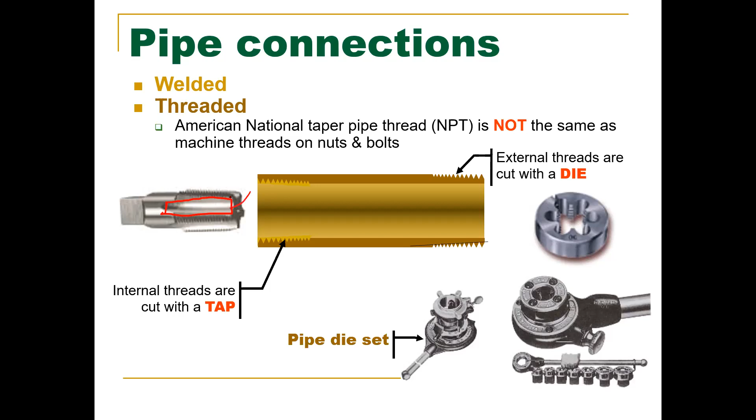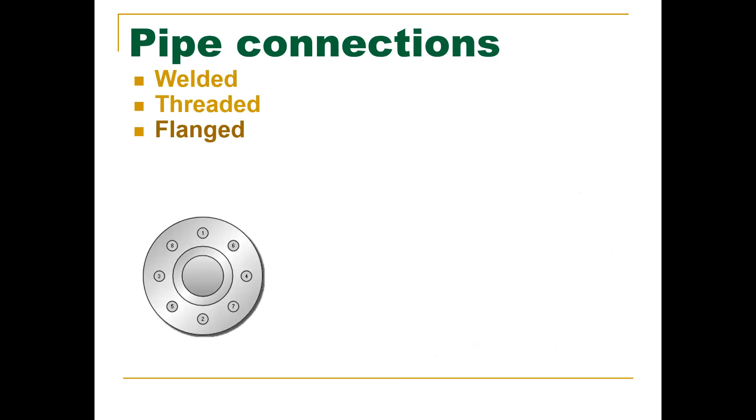Did we speak at all about flanges? Flanges may be threaded, welded, or cast into the pipe section. You can see right here, this one is a screw flange. You have the actual flange itself, this metal piece right here.

This metal piece right here is going to be threaded onto the pipe. We also have a flange that the pipe is spread out.

You can see it right there, and that's going to be stopping the flange itself. Then we have a flange that will go on and it's welded on both sides, so it doesn't have leak by going either way.

And then we have over here, which is a welded neck flange, where the entire flange goes deep outwards, and it meets up and we do that V groove, that V weld.

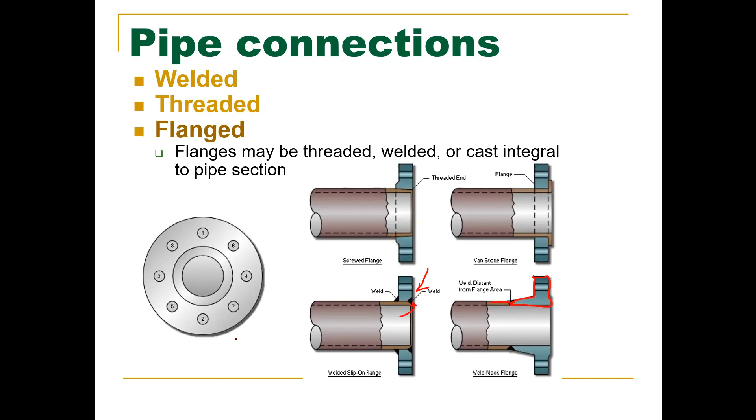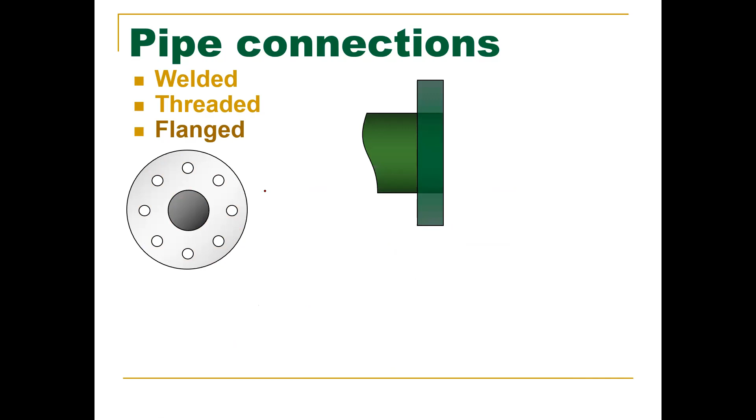So when doing flanges, this is when we start using gaskets. For low pressure, we use a gasket that covers the entire face of the actual flange. So when you see this sign right here, that is low pressure, LP. These are made out of rubber, paper, flexible graphite, synthetics, stuff like that.

For you guys who go out and decide to ship after this, the best paper to be used as a gasket is chart paper. Chart paper is pretty thick, thicker than normal paper. It does really, really good job at that. So if you're a mate in the class and an engineer comes asking for it, this is the why, this is the reason.

Going from there, we use bolts and nuts to screw it together. They're tightened down, and here's the big thing. If you look at this, watch how that goes in, notice how it's going in an opposite pattern, each one it goes in, it goes to the opposite. That's done on purpose.

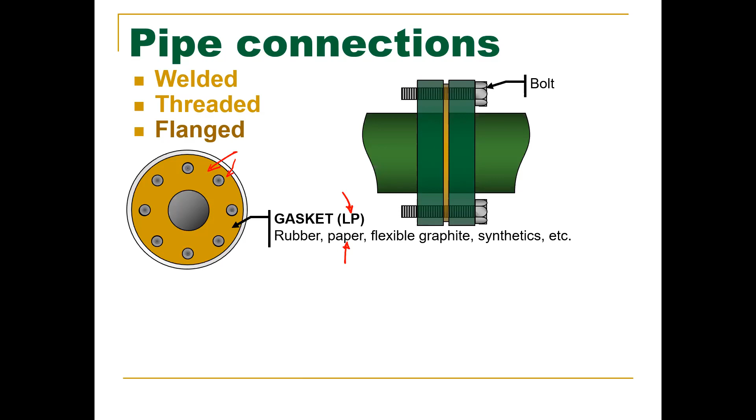It's called a star pattern. Not only should you be inserting the bolts like that, but you should also be tightening them down in that pattern as well. They're done that way for a reason. Why would we want to go from 1 to 2 to 3 to 4 to 5 to 6 to 7 to 8? So that it's even.

You want to go down even, exactly. If you don't, you'll end up with a flange that will look like this, and it'll just leak out of the top. So always use what is called a star pattern, or if you have a picture that looks like that.

Now, let me erase some of this so you can actually physically see it. If you look, this is going to be HP, and it's different. We have our flange piece right here, but it also has a piece of metal that sticks out, you can see that here.

That's that ring right there, a physical piece of metal that's sticking out from the flange. And it's important because high pressure gaskets are smaller and they're used differently, they're either metallic or Flexitallic. If you notice, the whole gasket isn't all the way around like it is there, it's a very thin spot that goes right in between those two pieces of raised metal.

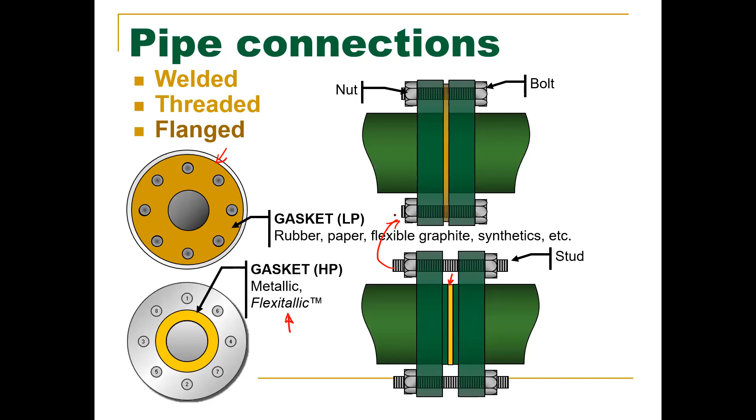Then they use studs instead of bolts and nuts. They still get nutted down on each side though. You can use a stud on a low pressure side, but you can't use a bolt on a high pressure side.

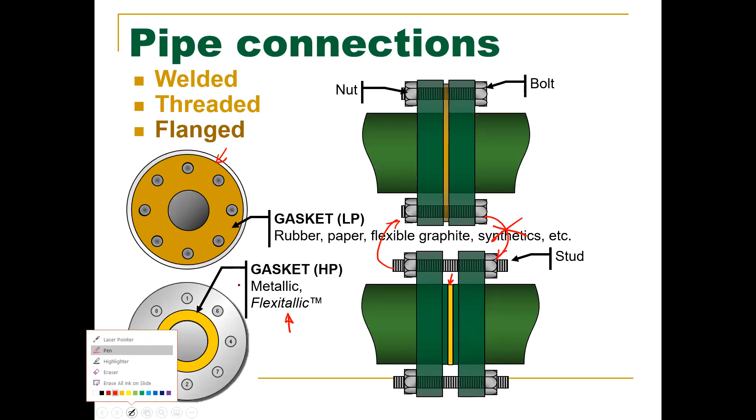What is different to the front of the vessel? Is the whole ship going to move in one whole piece? Does the ship bend slightly? So the ship will basically contort, it will move, it will twist differently in each portion of the vessel, depending where the wave is as it's getting hit.

So when you walk down Shaft Alley, when you go on your first cruise this summer during high seas, the entire Shaft Alley will be twisting in different ways. And it's why you can see it on the longest stretch of the ship, you can see that two different portions will be moving in two different directions, even though it's connected via steel. That happens just naturally, that's what's happening.

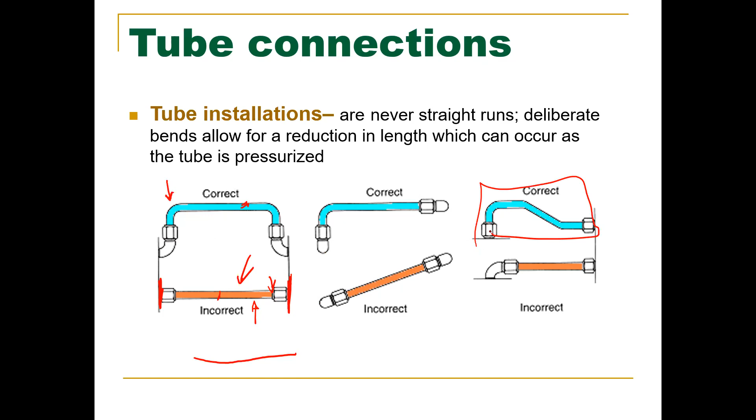Now, brazing or sweating. Who here has ever done any sort of copper soldering for piping, or done any electronic soldering?

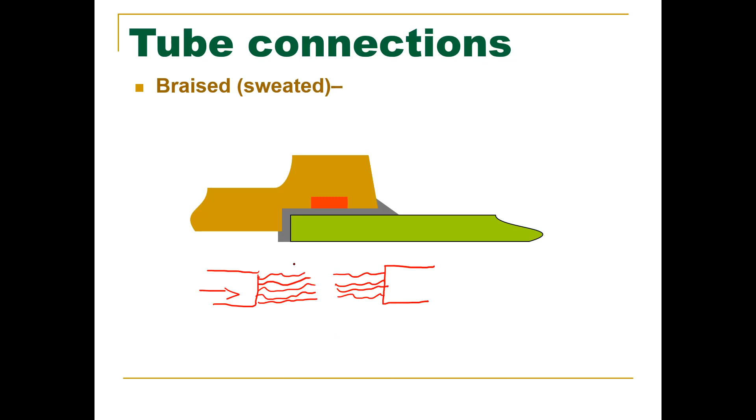When you are soldering two pieces of wire together, it's that stranded wire, it's not solid. What's the first step you take with it? Don't you twist it up? You would twist it up so it would make a solid connection, right? That's what you would do. You would take those two wires and twist and turn them into a nice little knot. Then you apply heat, then you apply solder, and you make it one solid connection. But twisting all those wires up, how are we going to get solder into the deepest part of that wire ball? We want to make a physical connection. We're trying to run electricity, and we want to run electricity through a full piece of wire. That entire diameter of wire, we want to run electricity through the entire thing, not just the outside. So how do we get solder into all those nooks and crannies?

We're going to utilize something called flux. That flux is a certain type of material, it's like a gel-like material. You would dip both ends of the wire into it, and as you bring them together, that flux is all over. What flux does is it melts and turns into a liquid right below the temperature where solder becomes liquid. As the flux begins to boil and becomes an actual liquid, you add the solder to it, and the solder will flow into all the nooks and crannies because it wants to follow that heat. It wants to go to that heat, and the flux will be pulling the solder into all of those nooks and crannies. So that bundle of wire that you've twisted together is now one solid piece. And that same idea of using flux applies to piping.

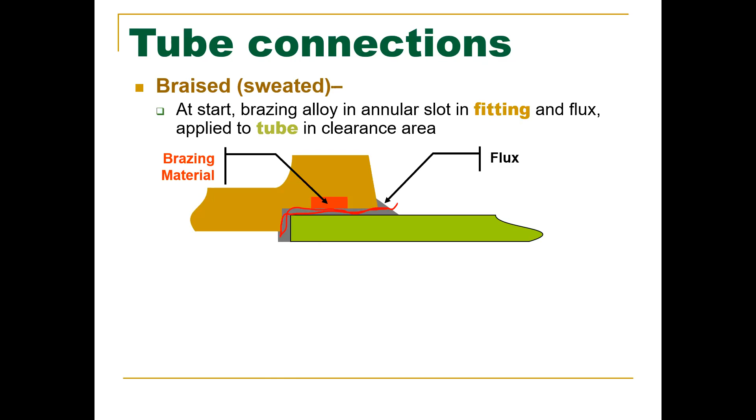We want to make sure that solder gets into all of the nooks and crannies of our pipe that we're trying to solder. So we utilize flux. We start with flux, we dip it into both sides, one side of our pipe, the other side of the fitting. We will heat the tube, and then we'll start to heat the fitting. We will then add our solder. Once the solder is added, it will flow to everywhere the flux was, and the flux pulls it all in. That's how we make that solid connection. Does that make sense? All right, good.

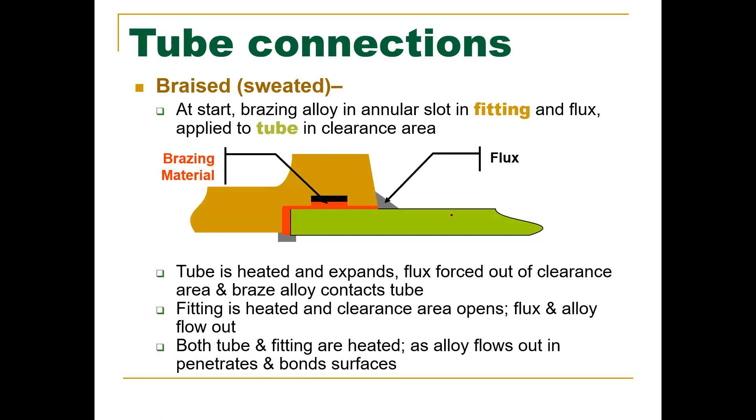So that's sweating. And then we can use something called flared fittings. Flared fittings use what's called a flaring tool. I have mine right in front of me. This is one portion of it, you can see it has a slight taper to it. Let me stop sharing so you can see it easier. It has a slight taper to it, and then this is the top portion, you can see that it also has a taper to it.

The pipe will be inserted into the hole, and you put the flaring tool into it. Let's find a good angle right there. You basically rotate it and smush the pipe to match both sides of that flare. So that's basically what you're doing, you're clamping the two and trying to utilize that taper on either side of the tool.

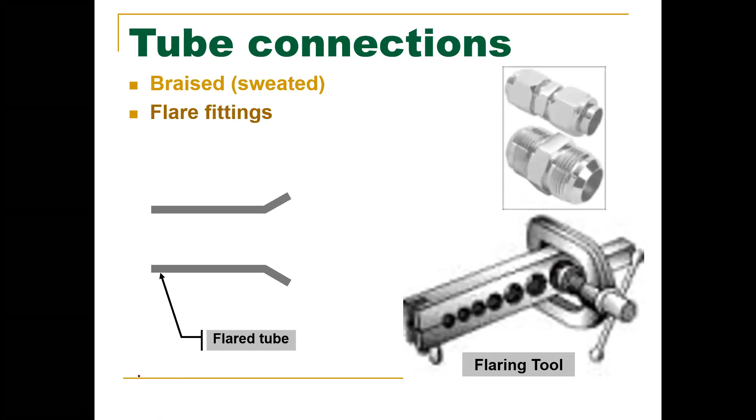Now, these type of connections will fail quicker than other types. You put these in because you have to, not because you want to.

What's happening as we flare out the copper tubing? What are we doing? Compromising the integrity of the pipe. Exactly. We're stretching, we're manipulating it, we're elongating it, we're thinning out the wall. Pretty much the failure point for these things is right there.

They will last a while, don't get me wrong, but they will fail a lot quicker than other types of fittings. Now, you will see these types of fittings around, used in different applications, but they're different from the copper type, using a flaring tool.

If you look below your toilet, below your sink, you'll see that you have flaring nuts, but it's a different type. They're not elongating the material.

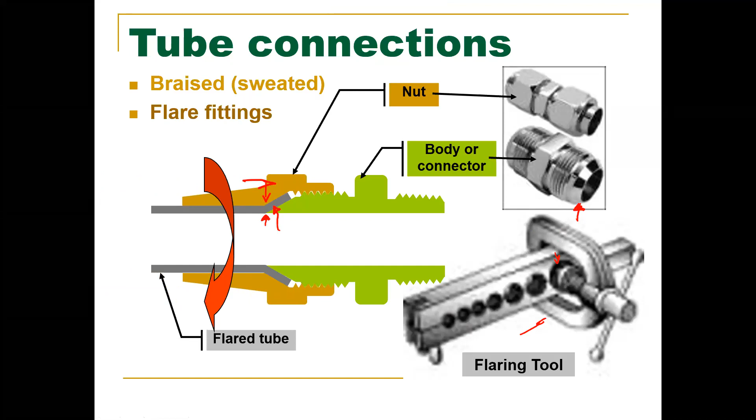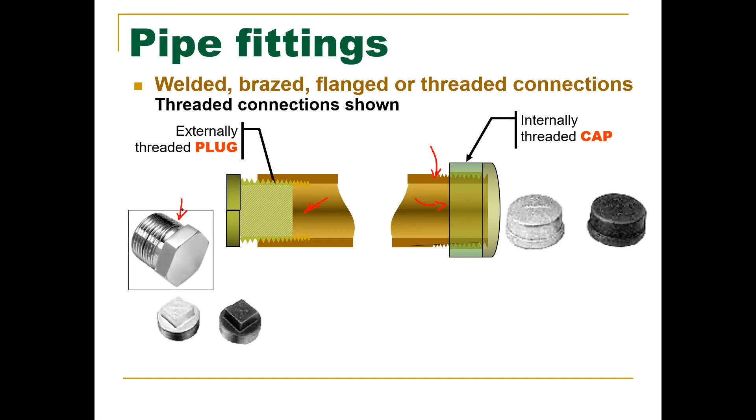So other types of pipe fittings that we have: if we want to stop a piece of pipe, we have what's called a cap. It uses internal threads, threads onto the external threads of your pipe, and it stops the flow. Then we have what's called a plug. A plug utilizes external threads to thread into the internal threads of the pipe.

If we have two pipes of equal size, we use what's called a nipple. They can go all the way up until about 6 inches. You tend to have all of these threaded fittings in what's called a Vidmar, which is just a big metal cabinet.

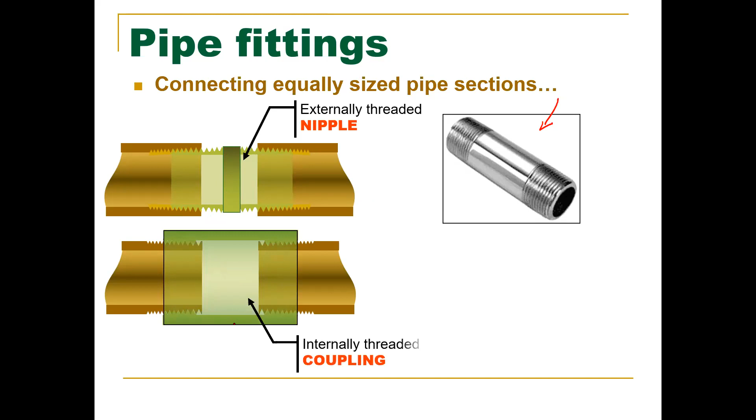These fittings basically utilize external threads to go into two sides of internal threads. Then we have what's called a coupling, which has internal threads that thread onto the external threads of your two pieces of pipe.

Now we have what is called a union. If we have a piece of pipe like this, we have pipe 1 and pipe 2. If I rotate this pipe this way, what happens to pipe 2 if I rotate that coupling in that direction? It gets loosened. It gets loosened where? Pipe 1.

Exactly, but that's only if pipe 1 is not able to free spin. If pipe 1 can rotate freely, then going in this direction will be fine. But if pipe 1 is attached to a bulkhead, or to a piece of equipment or a long piece of pipe, it's exactly right: as you screw down and go in this direction trying to tighten it onto pipe 2, you will unthread it from pipe 1.

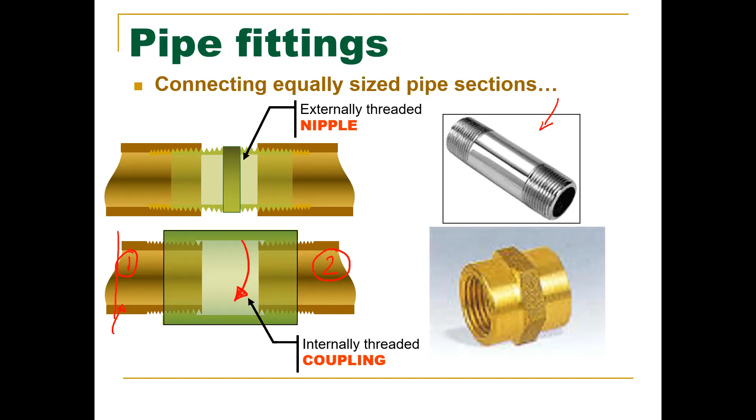And that's where a union comes in. It's made up of 3 pieces. We have one side that will thread onto one pipe normally, and the other side will thread onto the other pipe normally. These are 2 separate pieces. Then we have a third piece, which is the collar, that will basically unite the 2 together.

And it utilizes a metal-to-metal contact right here and right here, and that metal-to-metal contact is where our seal is being created. These threads right here do not create the seal between these 2 pieces of this union. It's metal-to-metal contact on these things.

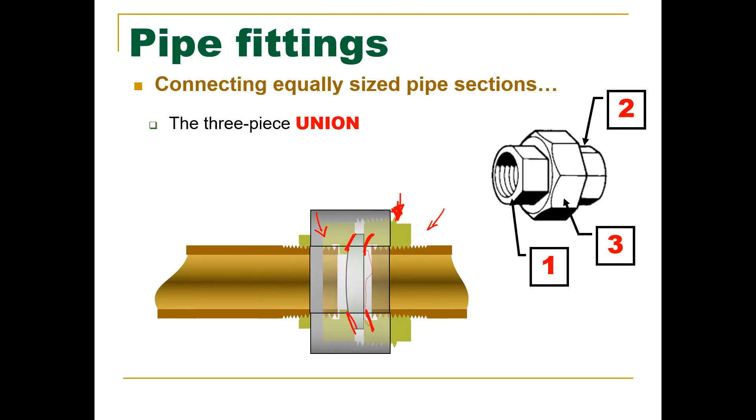The nice thing is that you can remove piping without having to cut out large sections, all the way back to the original piece of piping or equipment. This may be a 4-foot long piece of pipe with all these different things on it in order to free up this pipe to put a coupling on. That would be ridiculous. So if you want to break a section of piping into 2 sections, you would use a union.

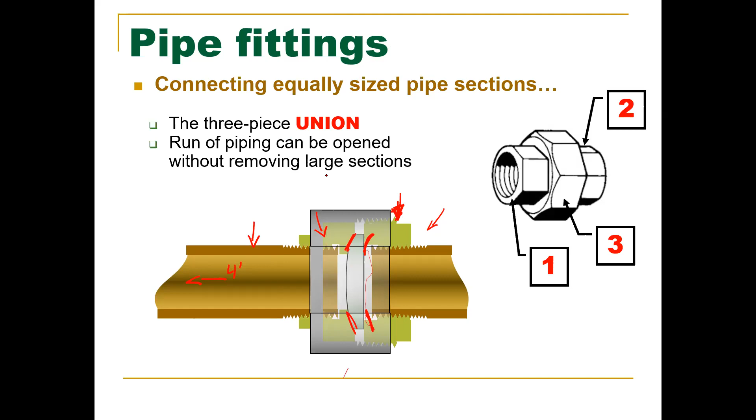If you have unequal sized pipes, this is a bushing. It utilizes external threads and internal threads.

And then we have what is called a coupling, a bell reducer. The bell reducer has both sides with internal threads, and they're unequal size piping. They don't use metal to metal for that one. These are threads, all threaded connections here.

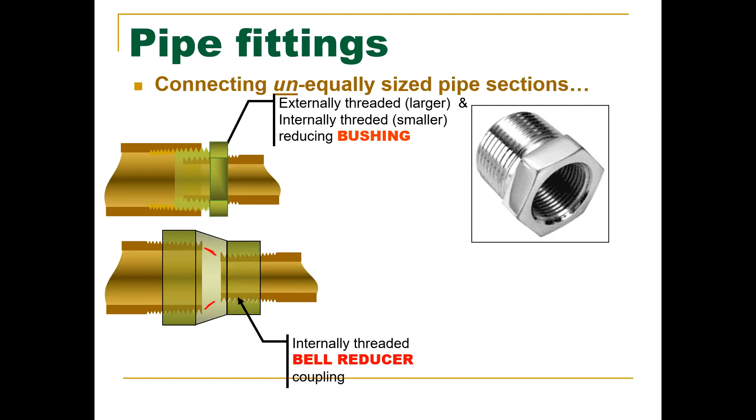So when it's all threaded, you don't need a metal to metal seal. There's going to be nothing in this area making a seal, so the 2 pipes are not making contact with each other. There's going to be a space here. I have some pictures after we're almost done with these slides that we can go through, and it'll make a lot more sense.

If you want to connect multiple pipe sections together, we have what's called the T. So there's our 3 connections right there. We have a reducing T. More often than not, you will see a reducing T that will not look like this. This is nice if you want to add chemicals to a water stream or something like that.

If you're going to have a reducing T, fluid will be coming in this direction, a 1-inch piece of pipe coming in, and then it will be split off into 2 different directions evenly. So this would be a 1/2 inch, and this over here would be a 1/2 inch piece of pipe. The flow will go to 2 different directions evenly. Or you can have it opposite, where 2 different feeds are going in at 1/2 inch and come in together, and one won't have dominance over the other with flow.

So that's a reducing T. And then you have a T with a side outlet. I have quite literally never seen one of these, very specialty. This is not something that you would have on a ship just on standby. You would have T's and stuff, but a side outlet T, no, that'd be something you would specialty order.

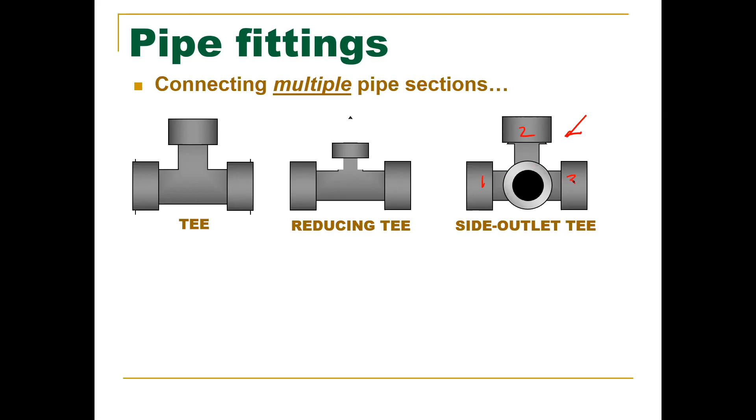So it has 4 outlets: 1, 2, 3, and then the 4th one right there. You have a cross, again the 4 outlets, 1, 2, 3, and then 4. We have a Y bend. This one is utilized a lot in firefighting equipment, so look on the ship, you'll see these. One side will have the hose, the other would be nothing.

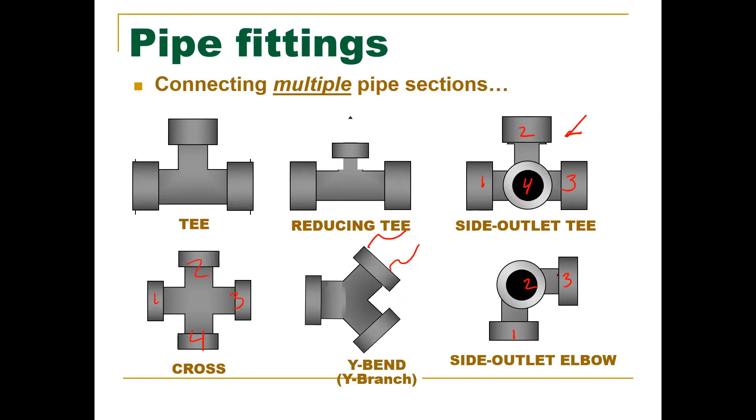And then we have a 90 with a side outlet, or an elbow with a side outlet, with 3 different pieces there. Now, if you want to change the flow and its direction, we utilize what's called an elbow.

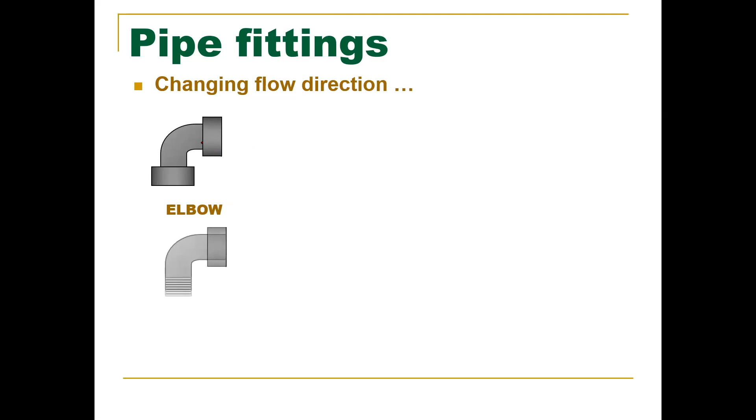Now we have something called a street elbow. These you tend not to see. They're specialty, but not as much as what I was saying earlier. Very specific times you would use these street elbows. The main reason is the distance from here to here is less than the distance from here to here at that center point. It'd be utilized in a spot where you can't fit a regular elbow. This street elbow gets inserted into another piece of pipe.

Whereas the elbow, the piece of pipe is here on the inside, so you may not be able to fit using a normal elbow. You might have another pipe running right here, and you can't put a normal elbow on the outside of that pipe - it won't fit. So things like that, or you may have a piece of pipe up here that you normally wouldn't be able to fit because of that distance. That's what a street elbow is used for. They do have their place in the world. I've used them a couple of times.

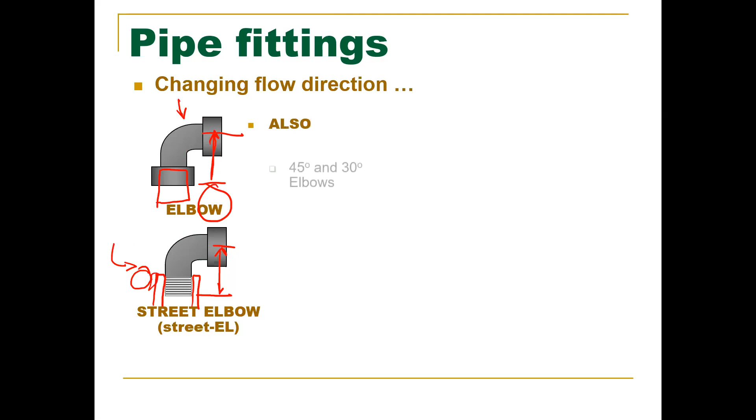And then all elbows come in 45s, 30s, 90s, reducing, every single variant you would imagine. We have U-bends, and U-bends with a little pipe at the back, with a back outlet. Again, it can go either direction. It might be a spot where you just add chemicals. That's really the only thing I can see these things being used for.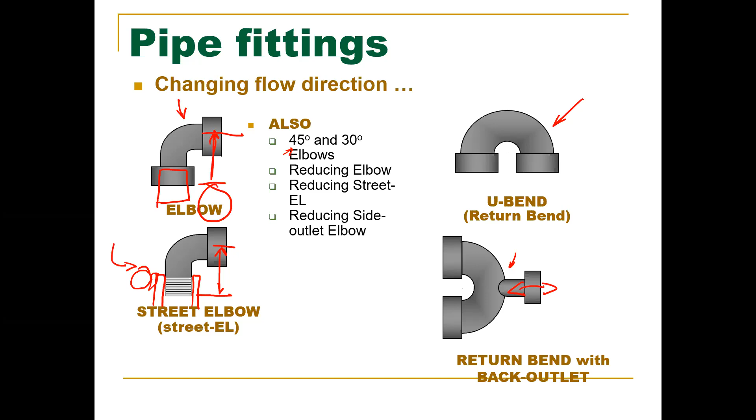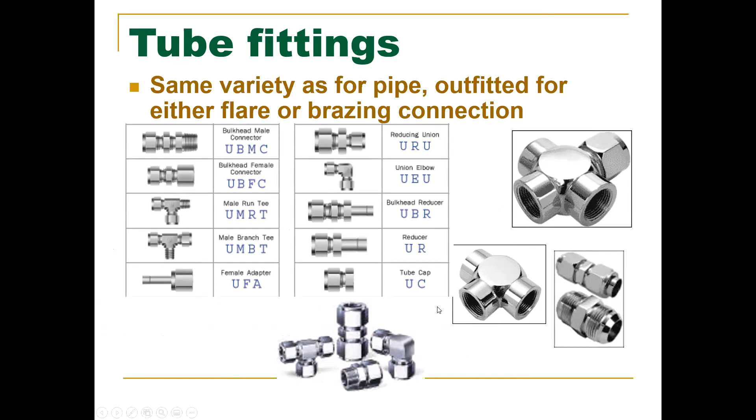Tube fittings, all the exact same, just in tube fittings. Now, any questions on that? Like I said, I'm going to show you guys pictures of bell reducers and stuff, so that way you have a better seeing of that.

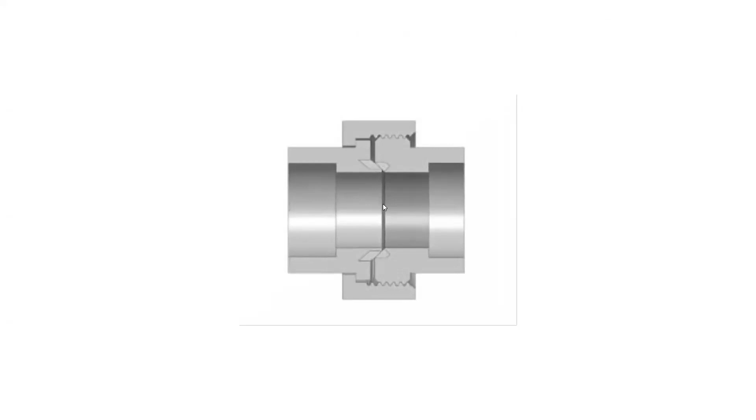Now we could see pipe fitting right here - this is a union, it's cut in half. You can see our metal to metal contact right here. So we have 2 different pieces. Are you guys zoomed in like I am or no? Oh yeah, okay good.

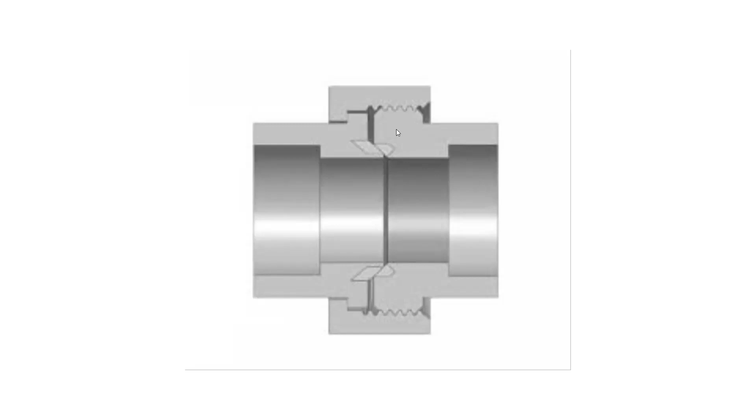So you could see the outside coupling on the outside here and here, and that's where that contact is being made - that's that seal. So this thing has to be ultra tight up on each other - it's really got to have some tension on there. You really can't tighten these things too much.

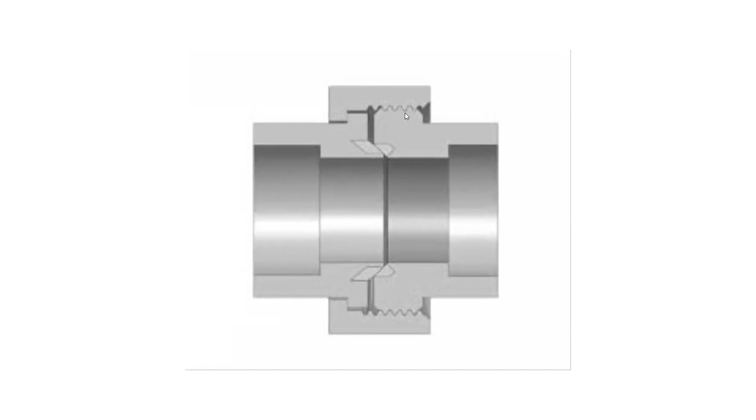Now, like I said, all these are posted. So you can see, again, that physical contact right there - that's where that is making its contact, that's where that seal is. Again, this is what you can use to break 2 pieces of pipe, so you don't have to take apart the entire system.

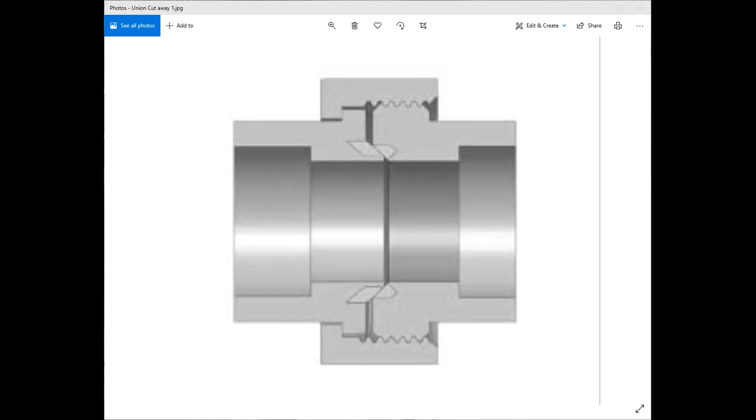Oh, that was sharing a different photo, of course. You guys got to tell me these things. There we go - that's the one I wanted to show you.

So you have that seal right there all the way around, and this one is threaded on like we saw. The other piping was going to be, had to be welded. That's the 3-piece union, right? Yep, this is a 3-piece union, just like the last one I showed you.

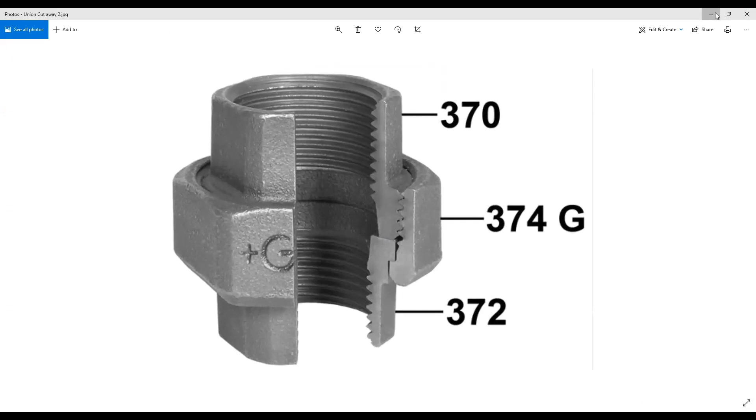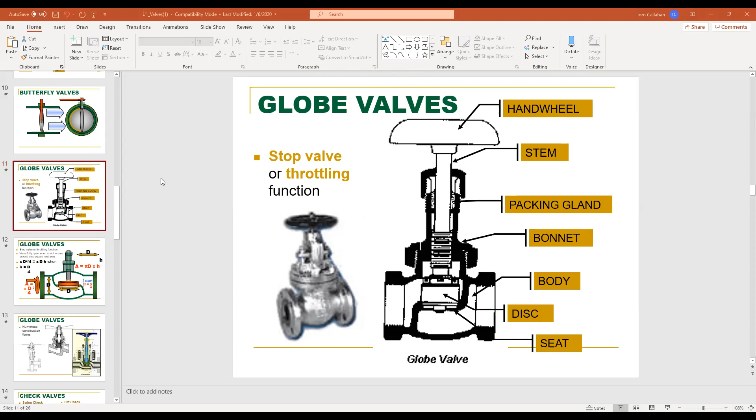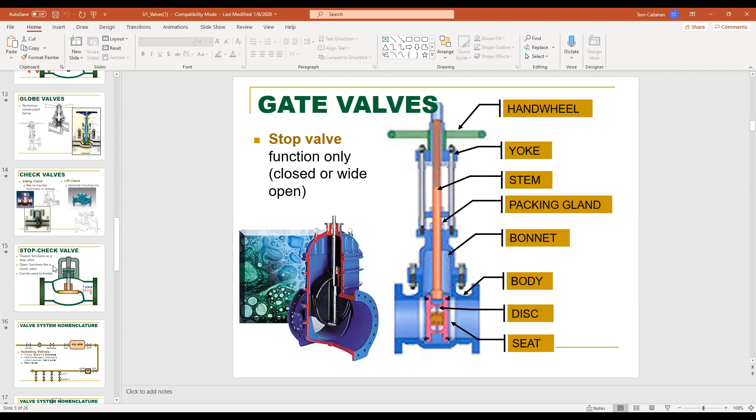Anything else? Professor, could we just go over a visual for check valves - when open when upstream pressure is greater than downstream, closed when downstream pressure is higher?

Oh, I hate it when it does that. I just want it to start on the slide that I'm at. All right, so swing checks and lift checks.

Swing checks, when you have a flow going in this direction, it will push open the check valve, it will swing open that gate. These things can be mounted horizontally or vertically, due to the fact that they can do just because of this pivot arm right here. Any flow that comes out this direction and can overcome this flow, it will basically hit this, and gravity by that time will close this. And all of the pressure that's up here will keep this closed. Now, any flow that comes in this direction, there's nothing stopping it from opening. That's the beauty of these things - they literally only allow flow in one direction only, and they can be mounted horizontally or vertically.

Now, a lift check utilizes like a plug. This plug right here goes up and down in this sleeve, basically. They're two different physical parts. The only way to remove the plug is to remove this bolt and to pull the cap off. They are slid in together, but they are not connected - the plug, this part right here, just rides up and down on that sleeve.

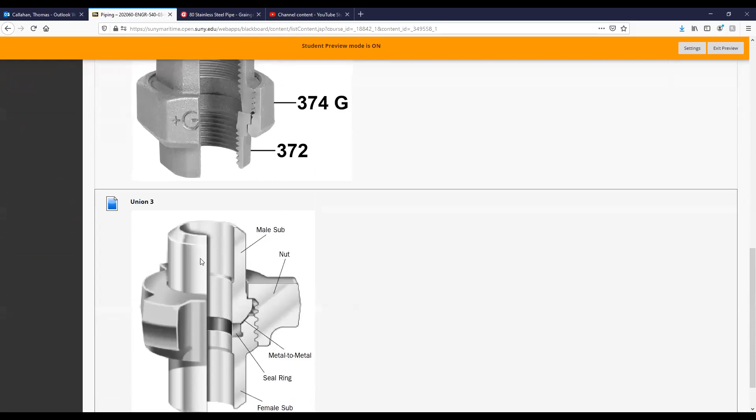We'll talk about that in depth on Wednesday. Okay, now go into the Modules on the side, I'm going to keep this pretty organized. First, the PowerPoints are going to be released to you guys about midway through, so you have time to study. The valves PowerPoint is right here. Piping is in a folder because I want you guys to see all of these pictures, I feel like they're important. We'll go through the syllabus in a second as well.

Now, quizzes will be in the quiz folder, labeled as we go. Extra reading is just stuff that I find, if you're not getting the material, feel free to read it. For valves, if you're confused, Science Direct has some really awesome stuff. You can come up here, there's check valves, globe valves, nominal pipe size. It's just a great website that pulls from all these technical documents, so feel free to use that.

Now, the important information folder, this is a lot of good stuff for your side of things. Here's the syllabus, here's the remote learning document, so that's another place you can find the Zoom link.

STCW and lab agreement we'll go over in a second.

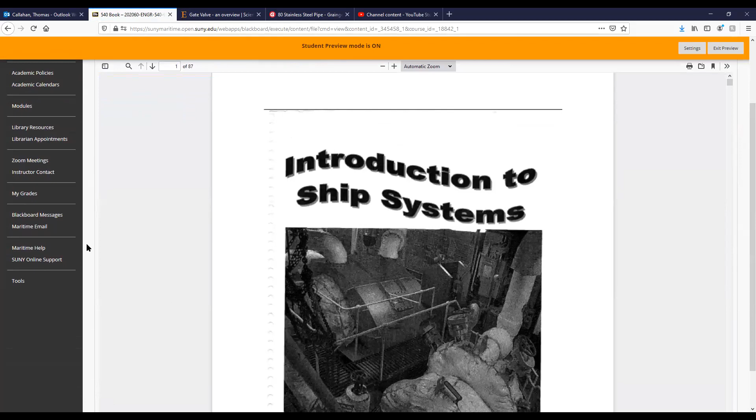This is the 540 book. I don't recommend getting the 540 book for this class. This is the one that will be suitable and fine. It will tell you all the information that you need to know. It was written by Professor Youngren, who is no longer at the school.

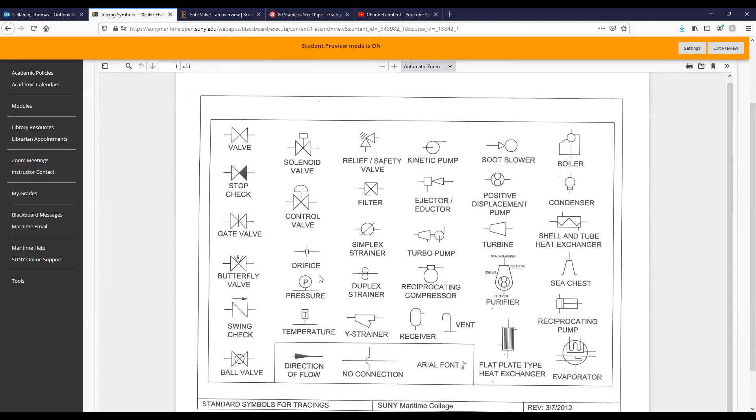So it's free to you. Here's some tracing symbols, symbols that I'm going to be showing and using throughout the class. You will have to basically learn these. You will have them memorized by the time you're done with this school, pretty much by your 2nd year here. So this is just for you.

Now here's two things. This is the STCW form that you're going to have to sign and submit to me. It opens up, and basically it's stating have you taken any STCW classes here at the college, and are you grad or undergrad?

I was a grad before, but last fall I completed my bachelor's degree at Stony Brook University in mathematics and geoscience. Nice, congrats. When I went to the program, the deck didn't really fit me well, so that's why I switched to engine instead. Understanding, everybody makes that mistake once, I did it myself. So you're doing a graduate degree. Yes, I'm taking it with an engine license. Awesome, good to hear.

So this is the engineering STCW class policy. Pretty much every single 500 level class, which is 540, 541, go for it, that is all of our license classes. So basically this goes out and it's for every single class.

You have to sign it, and it's the same story I tell everybody. Last January I re-upped my license, and I was sitting in the class with the captain, the chief engineer, and the guy who teaches advanced firefighting at the school at Maritime. He was in the class with me doing advanced firefighting. So the man who teaches the class has to take the class.

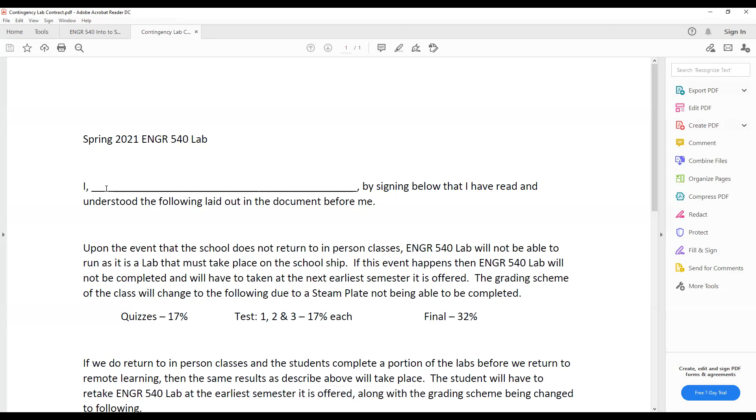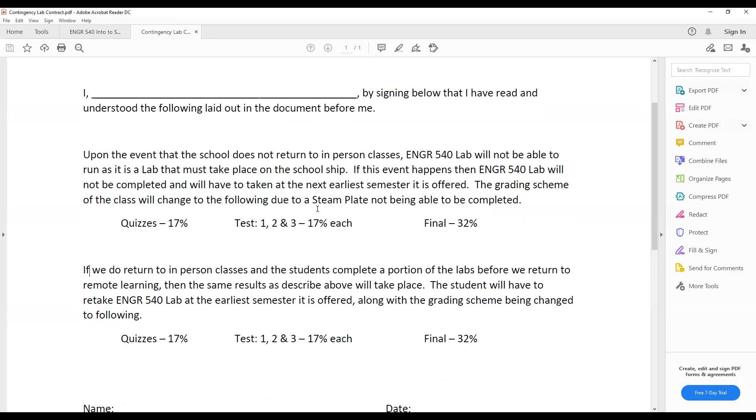So now here's a contingency plan. In the event that 540 does not run, like the lab itself, because of these two events, I'm just having everybody sign this acknowledging what's going to happen. The two events are basically if we never reconvene on the 25th, this is what the grading scheme will look like, and you will have to take the 540 lab at your next earliest semester it is offered.

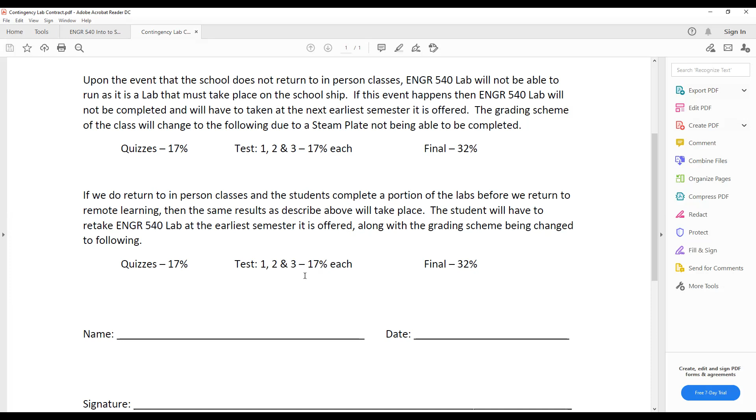And then the other one is that if we do return, but then we have to go back to online learning, again you will have to take it at the next earliest convenience. You would not have completed the lab. So quizzes, labs, and tests will result in that, name, signature, all that kind of fun stuff.

Okay, this is the syllabus. Three hours classes, one lab hour, three credits. There's no D or D plus, same as other STCW classes. Again, introduction to practical marine engineering.

Don't recommend it, I really don't. It was a book when I was here at Maritime, I just don't think it's good. I have to put it because I don't have anything better at the moment. So if you can get it for like maybe $50 or $20, buy it, wouldn't be the worst thing, but for $150, it's not worth the money.

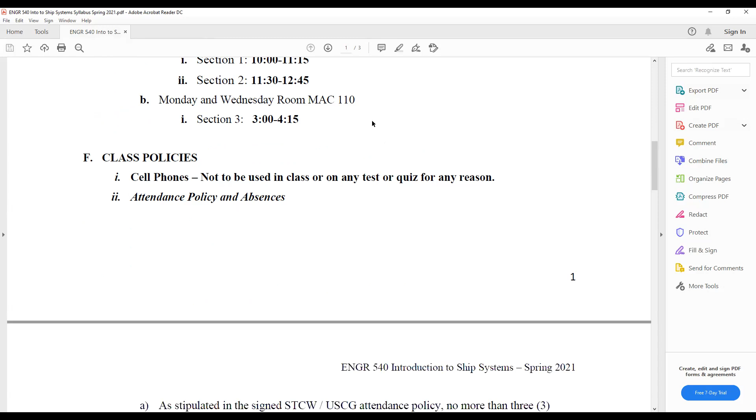Days and class meetings, I'm trying to get these rooms moved when they're fully updated. Probably next Friday I'll re-upload a new syllabus with the new rooms. Cell phones obviously can't be used. This explains again the STCW policy.

Grading: lab will be graded via this class as what's known as a plate. A plate is a tracing, a line diagram. We'll go into more of it when the time comes, but it's worth 10% of your grade.

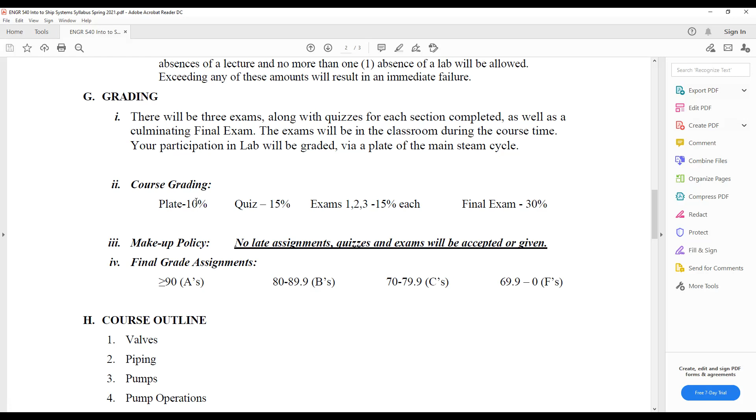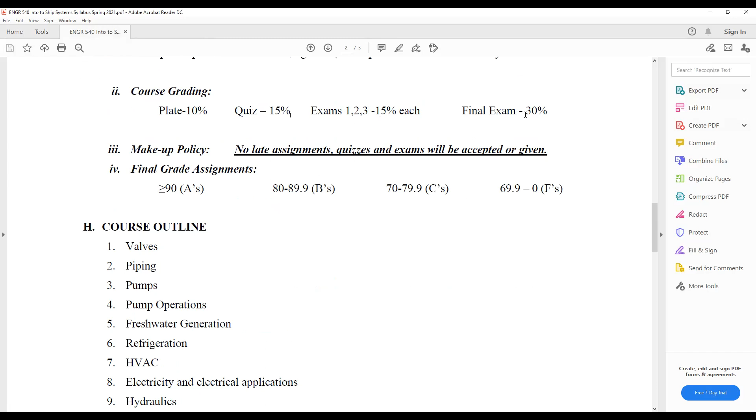Quizzes are worth 15%. At the end of all of these you're going to have 11 quizzes, all averaged together, 15% worth. Exams 1, 2, and 3 are each 15%. Final exam is worth 30%. This is the grade assignments. Again, 69.9 is an F.

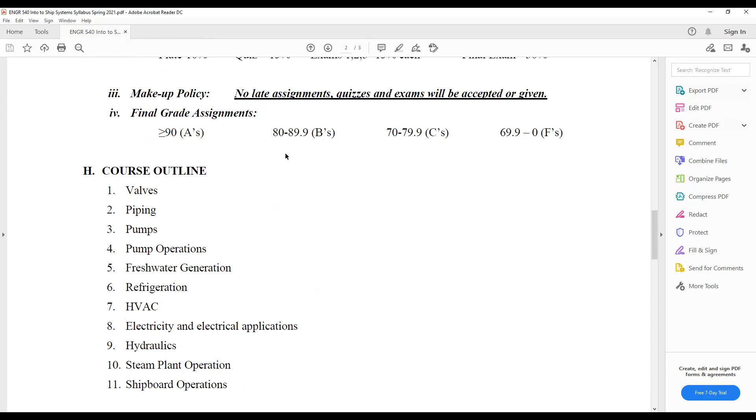Makeup policy, I don't have any. There is no makeup policy. Don't get it, there is nothing, can't do anything. The only exception is things like funerals, sicknesses, stuff mentioned by the STCW — I pretty much follow that. So if you have an excused absence, then that's an excusable makeup.

Quick synopsis, I tell everybody else: first exam will cover valves, piping, pumps, and pump ops. Second exam is freshwater, refrigeration, HVAC. Third exam will cover electricity and hydraulics. Then steam plant and shipboard operations is going to be a nice transition into our final, so we get it as close as possible to going on this cruise.

I don't know if you get accommodations like extra time on exams, anything like that, learning disabilities — I only accept them from Dr. Anderson, so get her to email it to me. I can't ask for it, you have to do it. I don't know if you do. And then you'll get it. Do you have it or no? No, I do not. Okay.

Academic integrity policy, again, just don't do it. Okay, stop that. We'll go into this once again. So that's all of that. Let me check, let's look. That is it.

Wednesday, can you come to my office hours? Yes. So Wednesday you'll come to my office hours, I'll email you a link. What time, 1:30? Let me see, start of it — what's best for you? It's only going to be a 15-minute quiz. If you want to take it right before we go into class we could do that, or if you want to take it early so it gives you time to study for piping.